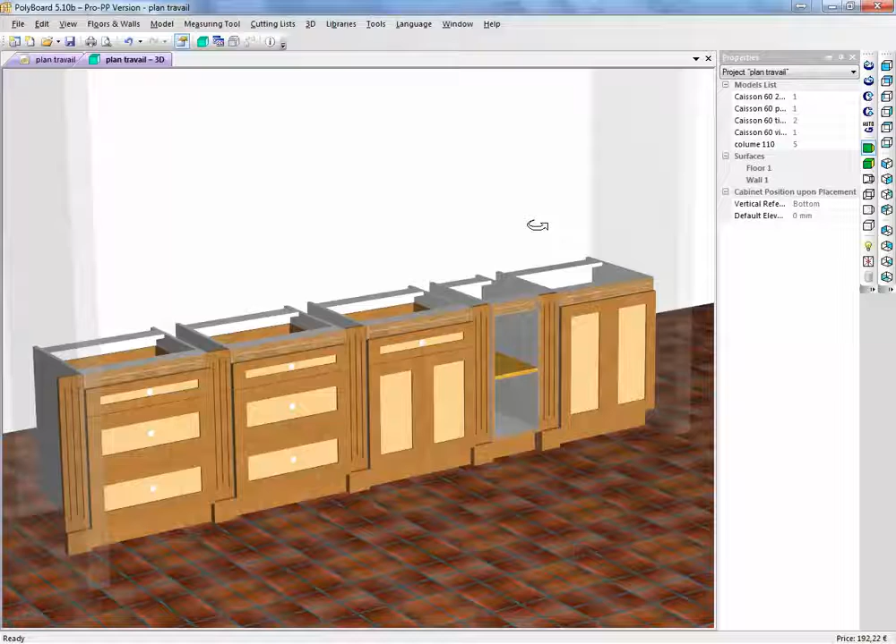And this is the case, for instance, in this particular project, where we have a series of cabinets inserted between two walls. I've made the walls here transparent. We've added decorative columns to these cabinets, and now what we want to do is add a worktop. How do we do this in Polyboard? Well, Polyboard 5 has got a neat worktop function which you can use.

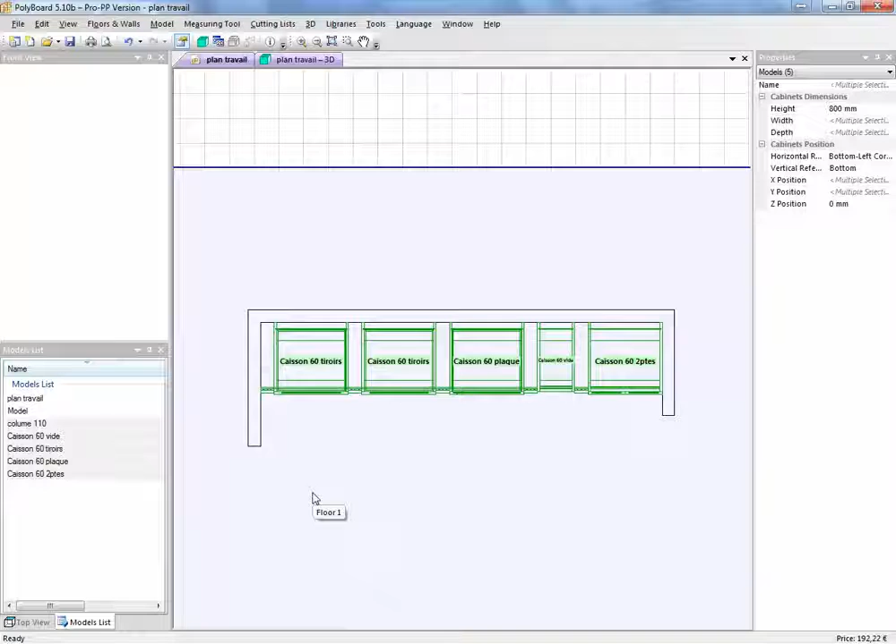If we have a look at how this works in Polyboard 5, if you just select all your cabinets and then right-click on the cabinet, there is a create countertop command. If you click on create countertop and you click OK, Polyboard will in fact create a countertop which is sitting on top of the cabinet.

The problem being, of course, that Polyboard will use the outer contour of all the cabinets. So here we have a countertop which is actually following the outer face of all the cabinets, which is not really what I would do here. This makes it a bit complicated. On these base cabinets, what I really want is just one straight, rectangular worktop.

So how do I do that? Well, there are two ways of doing it. I'm going to show you one way, how to use the countertop command in Polyboard, which is quite a neat way. Let's get rid of this countertop and go back into our work area. How do I make Polyboard sit a rectangular worktop onto all these cabinets?

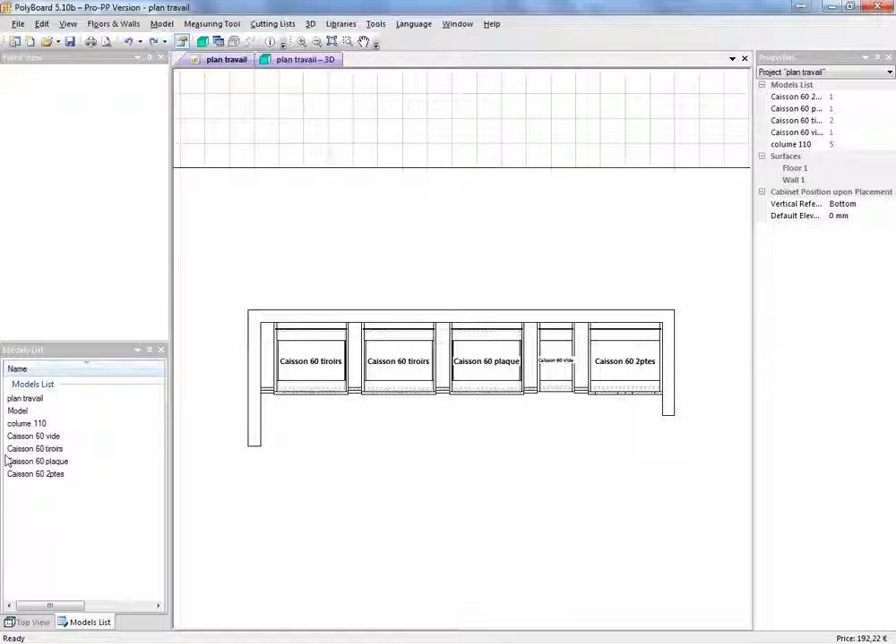Well, the easiest way to do this is just to create a new model, edit this new model, and here I have a new model I've edited. And what have I done? This is a model which I'm going to use not as a cabinet but to place other elements of my project. So what I'm going to do here is take off everything. Look, I've taken everything off except the top.

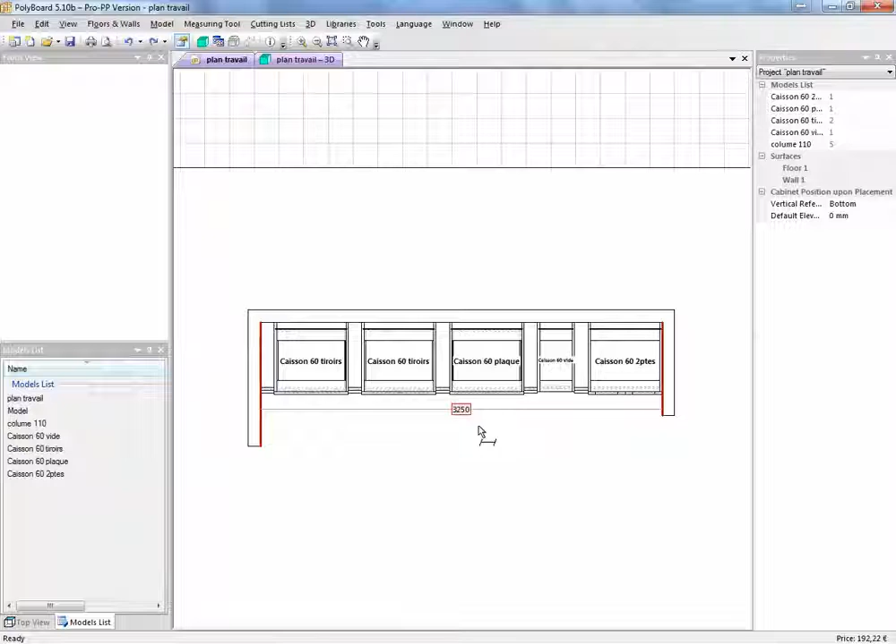I've only left the top, and the height of this cabinet is going to be exactly the same height as all my other cabinets, and the width of the cabinet is going to be the total length of my worktop. The total length of my worktop I got from this wall to this wall, using my horizontal measuring tool. I click here and I click here, I get 3250, so my model is 3250 long, and the depth of my worktop is the depth of the cabinets plus the overlap that I want.

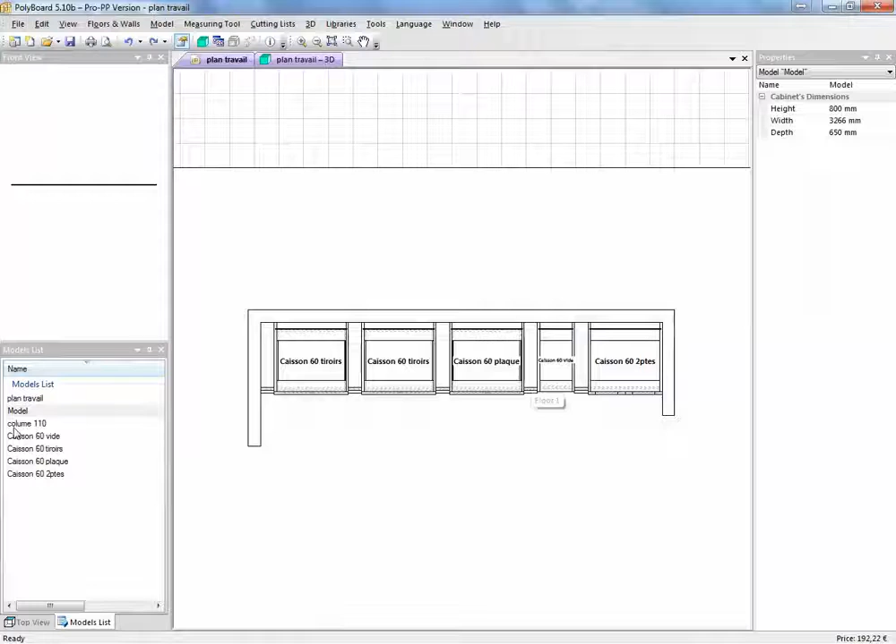So now I've prepared this sort of virtual model. All I have to do is take the model, clip it onto the walls, and now I have my virtual model. If you have a look here, it in fact has a 19mm top, but it is actually penetrating into these cabinets because it's the same height.

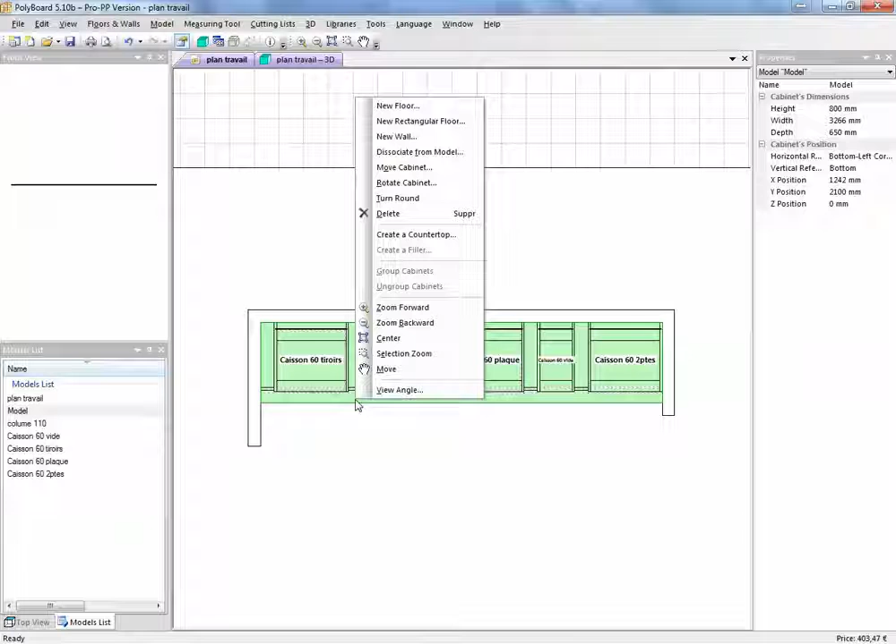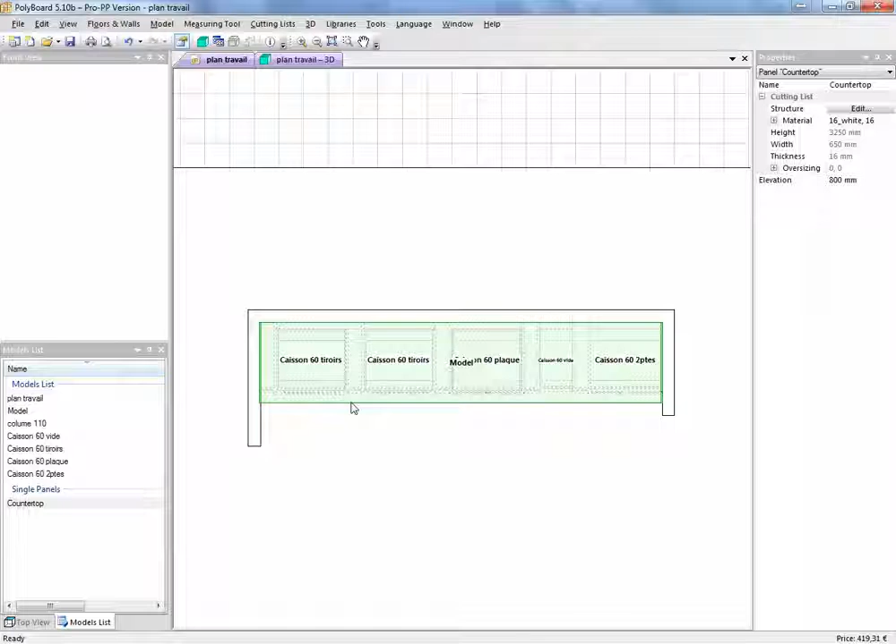But if I click this virtual model and I now say create a countertop, Polyboard will create a countertop for this model, and I will now have a countertop which is resting on the model, and the model is just the top here, which I'm going to get rid of now. So I'm going to take the model, and let's get rid of the model now.

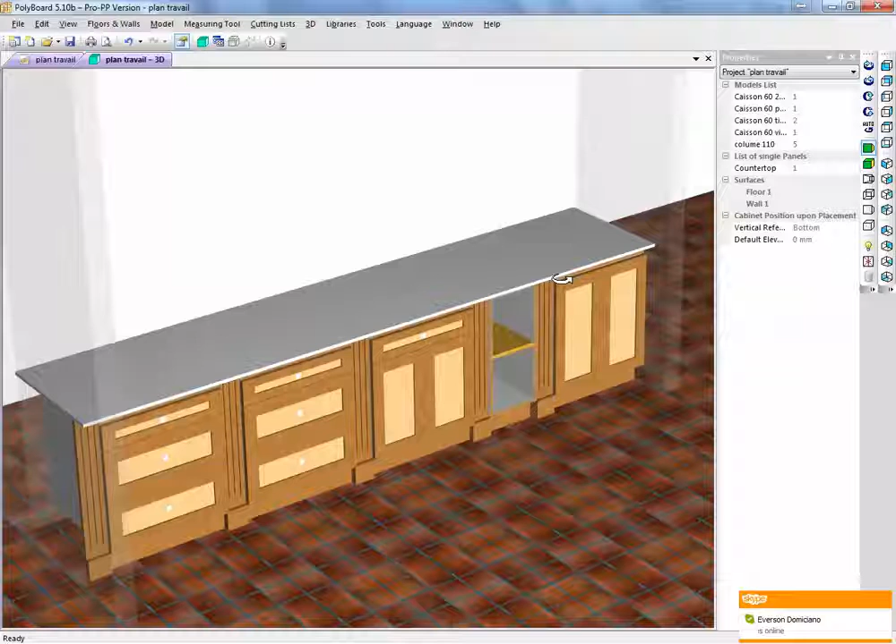Let's change the angle of the view, and get rid of the model here. I'll just get rid of it, and now we have our worktop on top of our cabinets with the overlap that I want, and it's just a straight edged worktop.

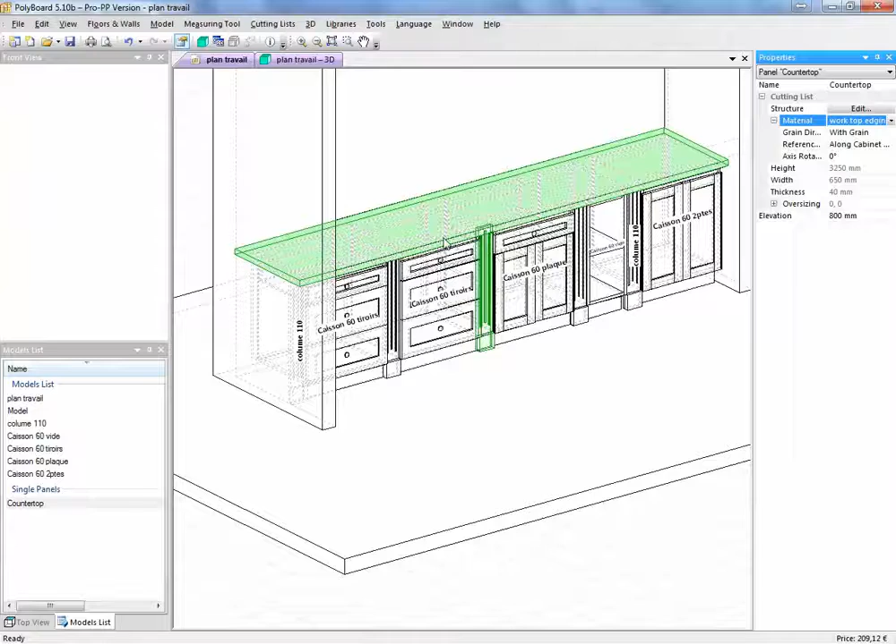The worktop is an element which only shows up in the project mode, but will be counted in the cutting lists. So if I want to change the material, I can change material here and add, for instance, a worktop edging of 40mm, and here we have an oak type worktop, 40mm thick, just sitting on our cabinets.

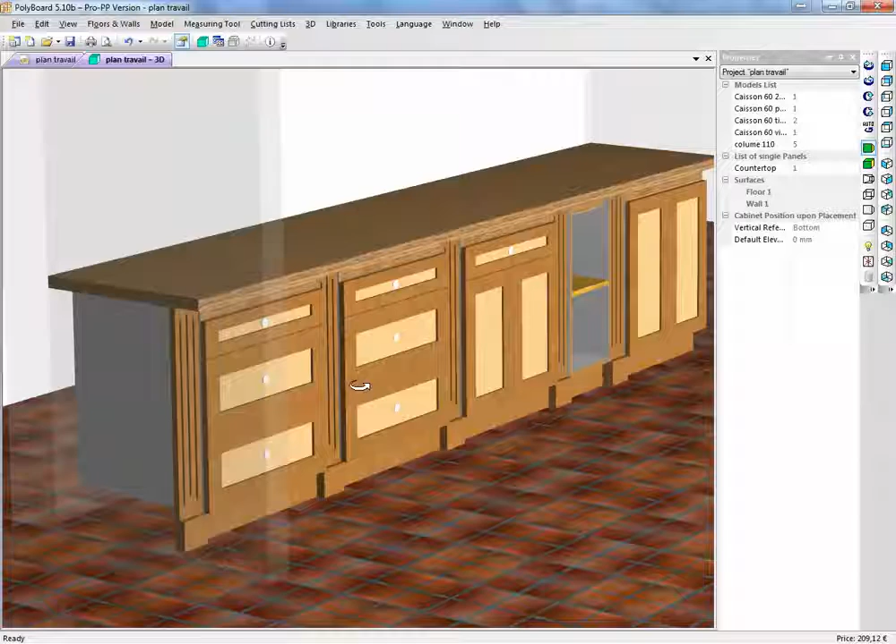So here we now have the countertop in oak added to our project with the overlap here that we consider a good overlap for our base cabinets. So I hope that's been interesting for you.

In another video we'll go into more depth on countertops. Countertops can get quite complicated. We have to be able to cut them out, and Polyboard 5 does give you the possibility to do cutouts in the countertop for inserting sinks and cooking units, etc. So we'll have a look at that in another video.